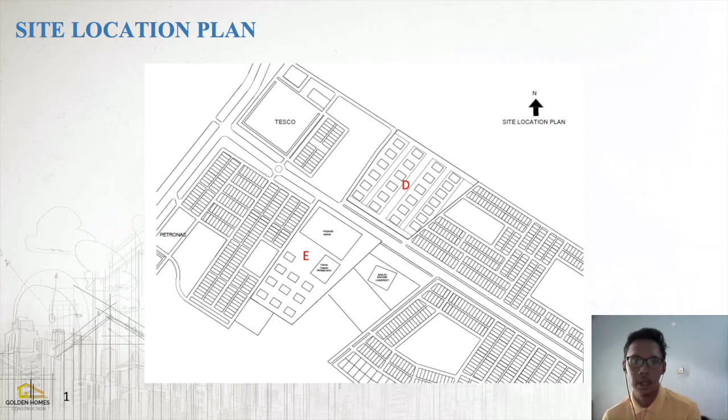Our project is at area D and area E. We propose to build a double story house at area D with 20 units, and at area E, 10 units of single story house.

We move to the first design, which is the double story house. This is the ground floor plan. As you can see, we have dining hall, wet kitchen, dry kitchen, guest room and family hall. The area of this ground floor is 2,248 square feet.

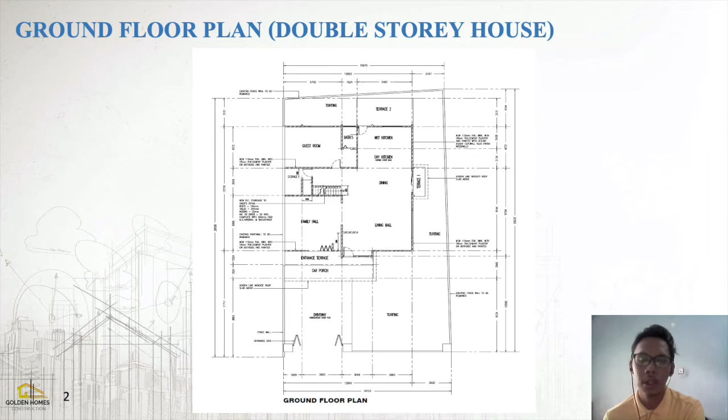This is the design for the second one we propose for the residential area, which is the single story house. The total area of this building is 2,271 square feet. We provide 4 bedrooms and 3 bathrooms.

Other than that, we provide dining hall, living room, balcony and kitchen.

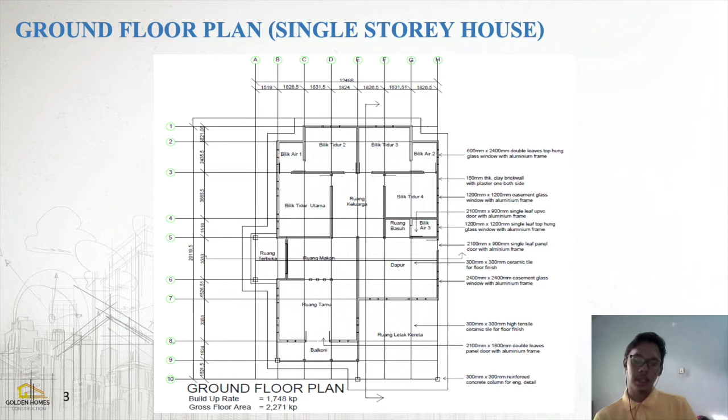Now we proceed to the next drawing, which is the first floor plan. The total area of this plan is 1,689 square feet. We have 4 bedrooms: master bedroom, bedroom 2, bedroom 3 and bedroom 4.

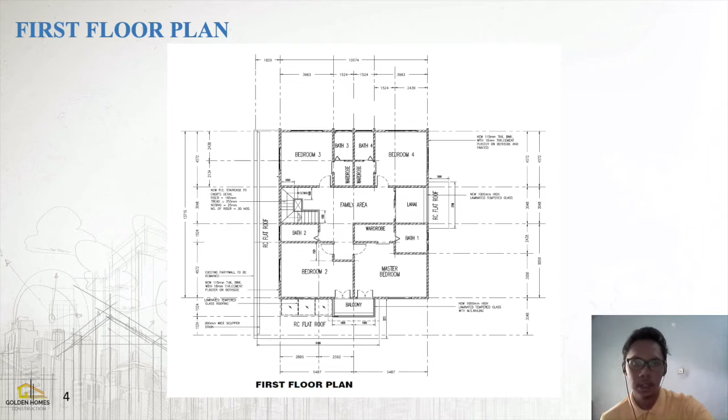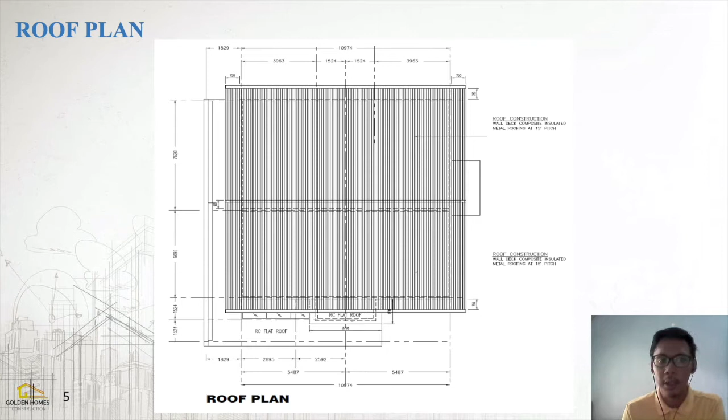Other than that, we also have 4 toilets, 3 wardrobes and 1 family area. For the roof plan, we use a normal type of roof because it's very suitable and easy to install. The material of this roof is wall deck composite insulated metal roofing at 15 degrees pitch.

Now we proceed to the front and back elevation. As you can see, we have various types of doors. For the front elevation, we use a folding door, and the material is metal, so our priority is safety.

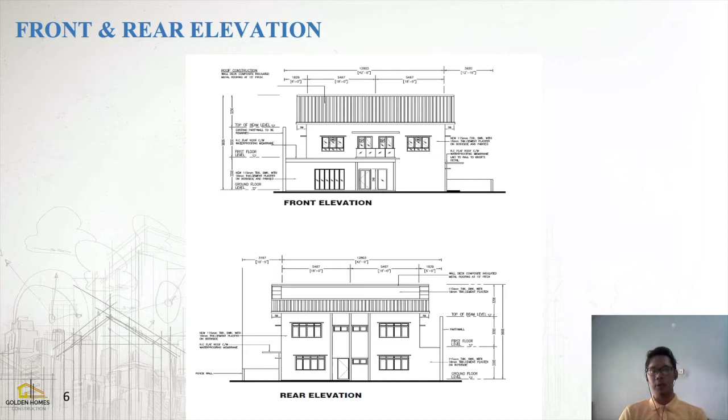For the main entrance of this building we use a solid door rather than flush or panel door because it's more aesthetic. For the windows, we use glass casement windows for both the front and back elevation.

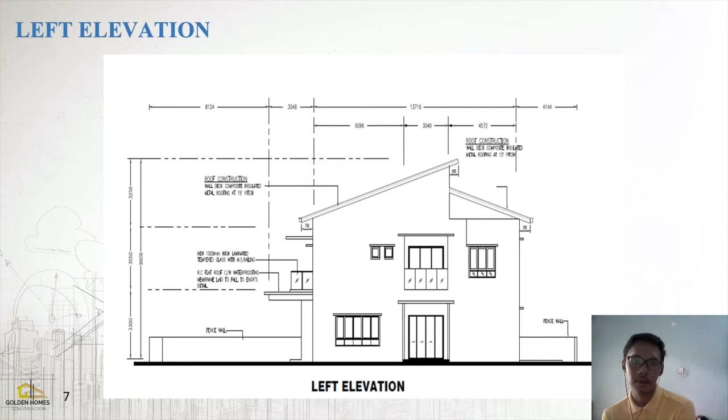This is the left elevation. Basically we use the same material of windows and roof, but the door is very different because we use a sliding door as the side entrance for this house.

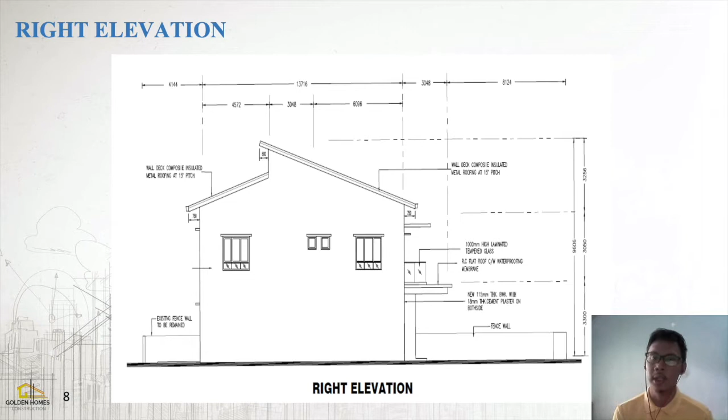This is because we have a lanai there. The function of the lanai is the place that we can relax ourselves and take fresh air outside the building.

So we move to the section XX. As you can see, when we cut the section XX, you can see the family area, dining, stairs, and of course the roof.

The detail of the staircase: the material of the stair is concrete, the riser is 165 mm, the tread of the stair is 225 mm, and the nosing of the stair is 25 mm. The number of risers of the stair is 20.

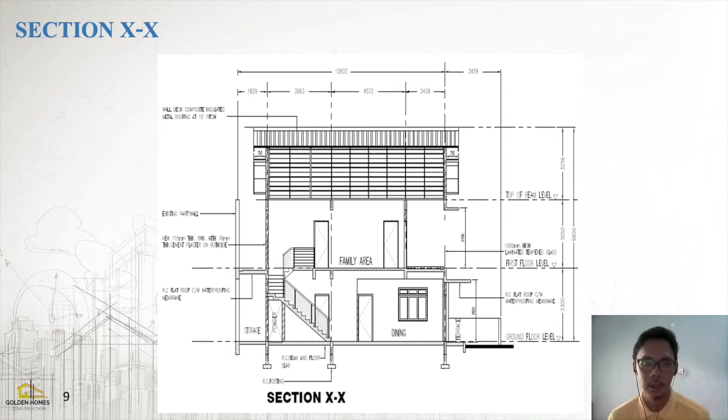We move to the last drawing for this design, which is section YY. We use the IBS method for the roof construction. The material of this roof, the purlin and the rafter, is made of metal.

We use IBS because it's very easy to install and faster than the normal one. The normal one means the cast in situ method, where we need to build the roof at the construction site, which may take time and the quality is not so good. For IBS it's made from factory, so the quality is guaranteed.

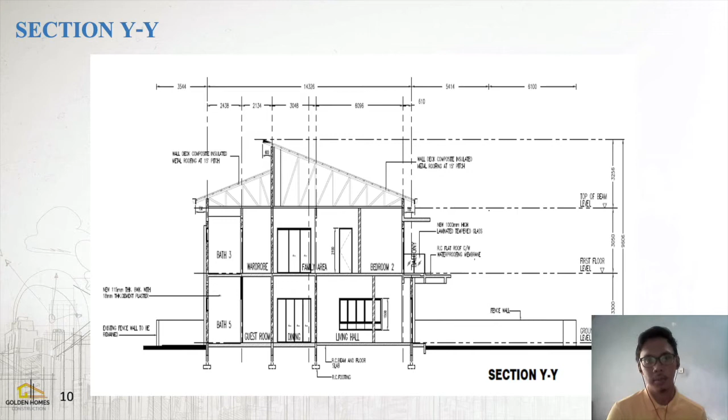After we cut the section, we can see the bath, the wardrobe, the living hall, the dining area, the bedroom and the guest room.

Next, we are moving on to the planning proposal of the project, the proposed development of residential housing at Bandar Universiti, Bandar Seri Iskandar, Perak. This project will be divided into two phases: phase 1 and phase 2. Project duration will be 486 days, starting on 4 January 2021.

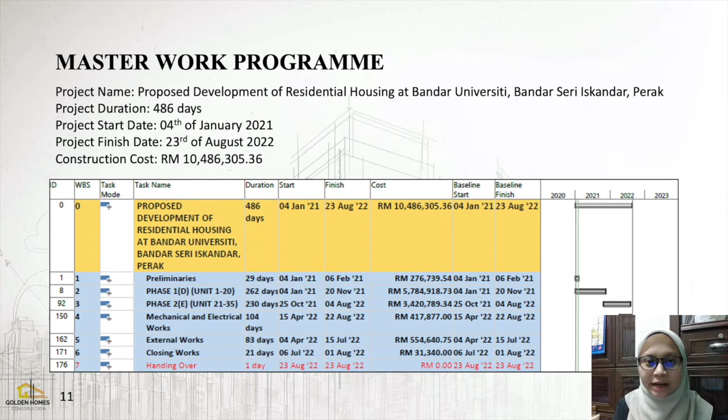The project is expected to be finished on 23rd of August 2022, with a construction cost of 10,486,305 ringgit and 36 cents.

Next, for the structural works phase 1, the work duration would be 199 days, started on the 8th of February 2021 and expected to be finished on the 8th of October 2021, with a cost of RM 2,895,547 ringgit and 18 cents.

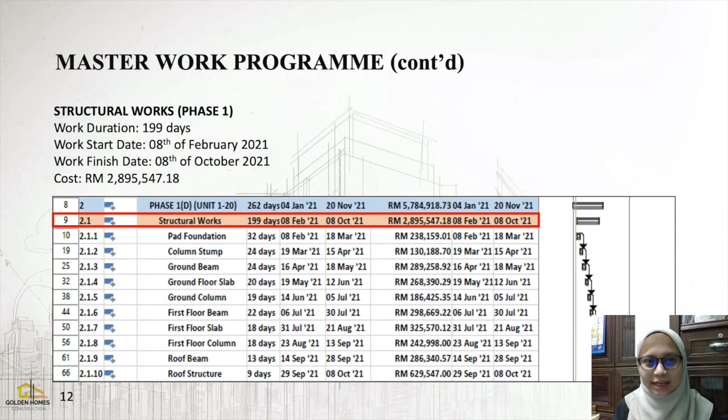Next, for the mechanical and electrical works, or M&E works, for phase 1 and phase 2, the work duration will be 104 days, started on 15th April 2022, expected to finish on 22nd August 2022, with the construction cost for the mechanical and electrical works being 417,877 ringgit.

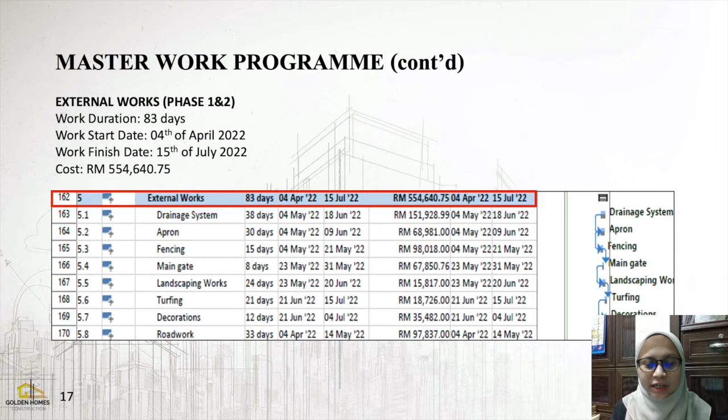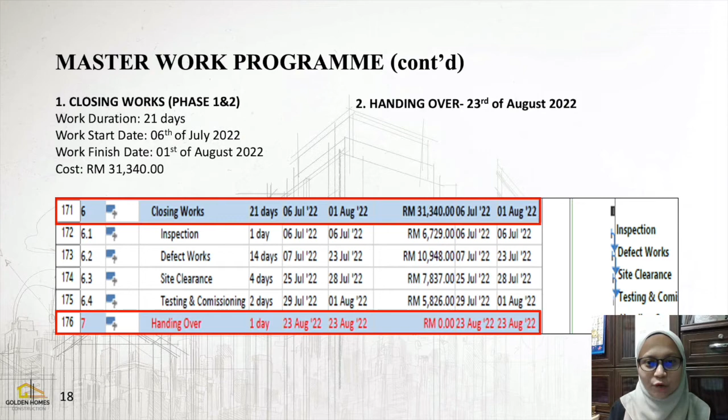Next, closing works for phase 1 and phase 2, with a duration of 21 days, expected to start on 6th July 2022 and finish on 1st August 2022, with the cost being 31,340 ringgit. For the last task or activity, handing over will be on 23rd August 2022.

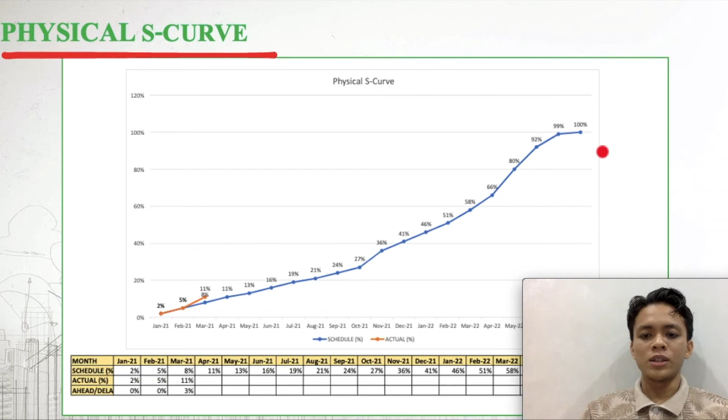On the graph, for the 27% we firstly get a drastic increase in plotting on its activities, which is 36%, followed by the next months where we get 66% on April 2022, which then became more slightly increasing, at 80%, then 92%, and finally 99% up to 100%, which is the final month of the entire project.

So this is for the January progress, the first month of our actual tracking progress. We can see that the actual project is slightly ahead from the planning one. For our prelim, the difference is we actually achieved 100% on the overall first element.

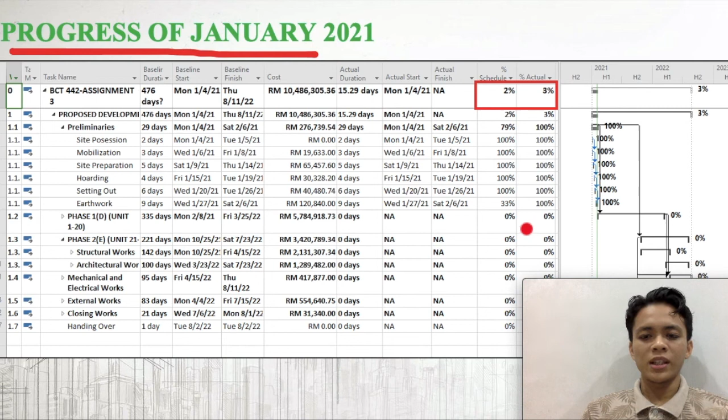The next one is our structural works, which we haven't touched yet, following up to the other activities.

And here is the February progress, where there are actually no differences at all, the actual one is 5%, the same as the planned one.

And for the final month, which is March 2021, we did some ahead progress, which is 11% compared to 8%.

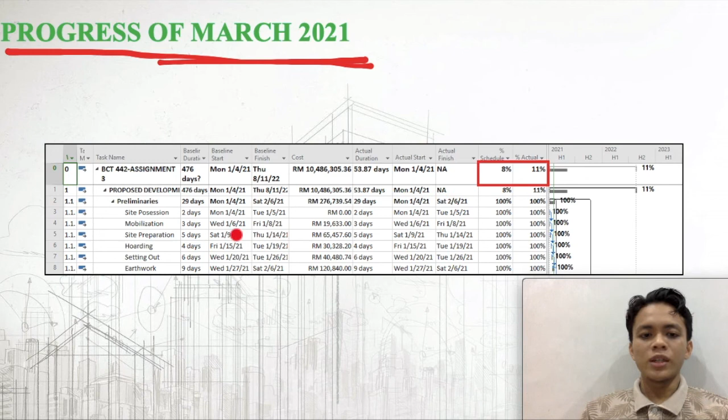And here, like usual, for the prelim activities already done, we continue for the next activities, which is structural works. So under these activities there are pad foundation, column stump, and also ground beam.